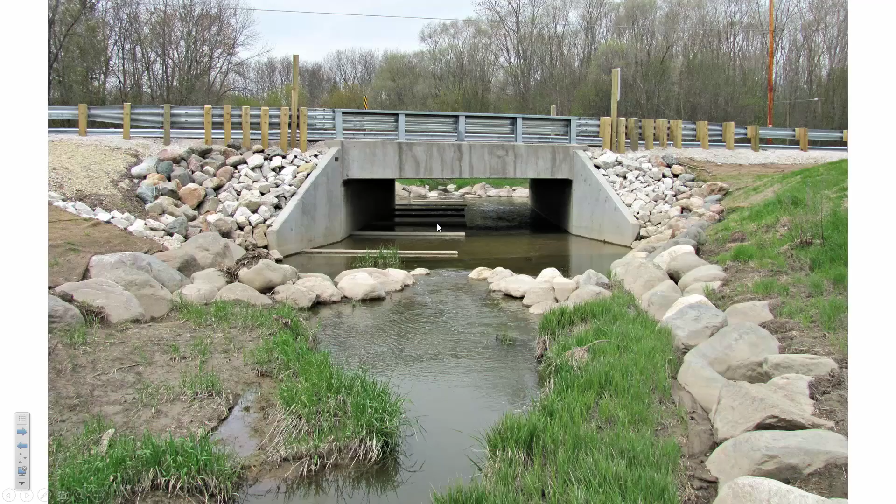My area of water resources largely considers questions like: if there's a river and a road is going over it, how big does the culvert or bridge need to be to pass a certain flow rate? Because if it's too low relative to the water line, when water levels are high, it'll flow over the bridge and cause damage and delay, and people will be stranded.

So I do some hydrological modeling to look at what happens when it rains and how quickly a flash flood will arrive in a given spot. That's actually very closely related to what our main speaker is going to be talking about today, I would imagine—his background is in hydrology and hydraulics.

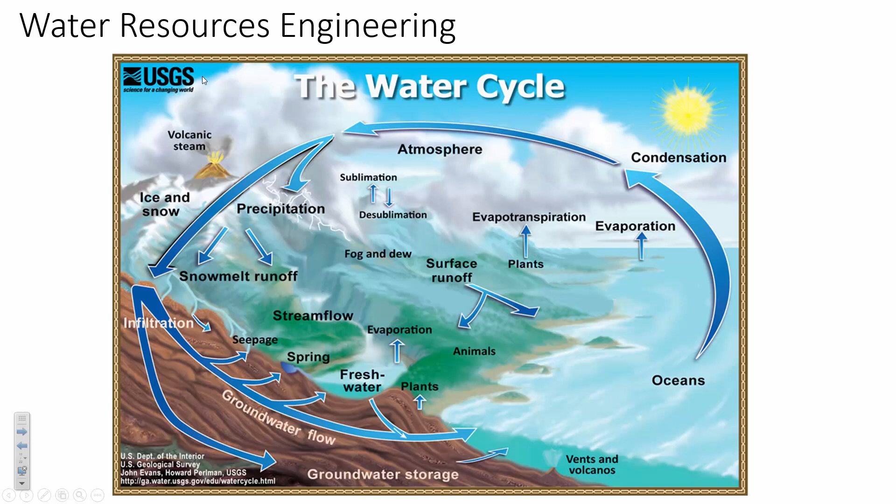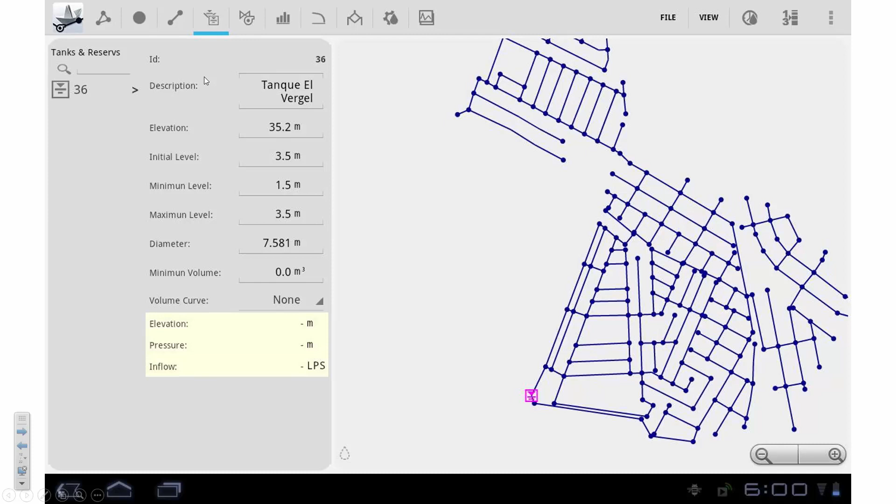In water resources engineering, we're studying applications of the water cycle. It's a bit more on the science spectrum versus applied engineering. This particular course I teach, hydrology, focuses a lot on the science of the water cycle to try to understand what phenomena actually drive the flash floods that so often cause problems here in West Virginia. We also look at water network sizing—the pipe networks that deliver potable drinking water to your home are sized by a water resources engineer with a background in hydraulics.

One of the interesting things that's come up in the last few years is you may have heard of a failure of a spillway out in California. A couple of years ago, the water level got so high at a reservoir, Oroville Dam, that the dam itself was fine, but they sent water down the emergency overflow spillway, and the water was moving so quickly, and there were some material issues with the spillway, that it actually scoured and caused a lot of damage. People were worried that potentially that scour could eat its way all the way over to the dam. So things were a little bit iffy for a while.

In all of engineering, there are consequences to our designs and to our analysis. And in civil engineering, sometimes those consequences can affect thousands and hundreds of thousands of lives.

Environmental engineering is focusing more on the quality rather than the quantity of the water and air and soil. So environmental engineers are using the toolkit that you learn as an engineer, the application of math and science to solve problems, and looking at ways that we can recycle and preserve our natural environment.

Here in West Virginia, we have some unique challenges that environmental engineers can apply their knowledge and skills on. We have a lot of mining operations that affect the state and have impacts on water quality. Environmental engineers can help to restore areas that have been damaged and design treatment so that new areas that are being developed aren't quite as badly affected as the old ones.

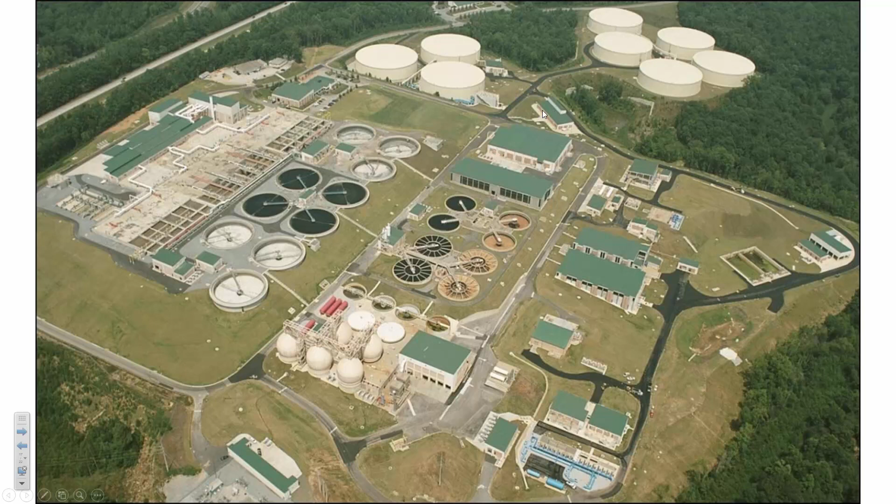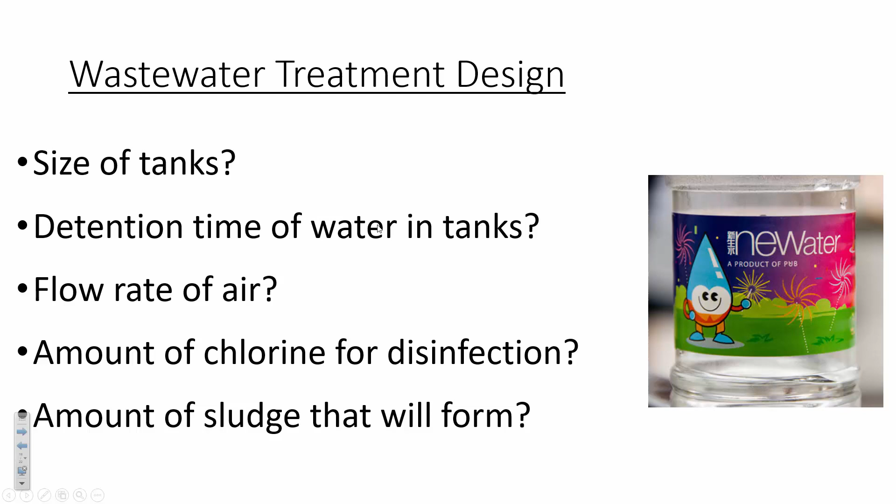We really want to have this process figured out and designed well and operating smoothly so that nobody gets sick along the way. So an environmental engineer who's designing wastewater treatment will be figuring out how big the tanks should be, how much time needs to be spent in each of the tanks for the treatment process. It's an interesting problem, and I enjoy teaching those classes when they come up.

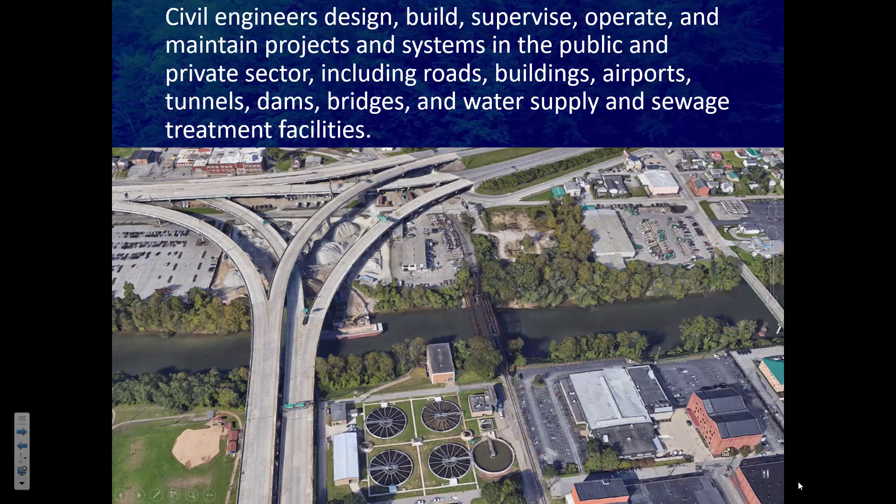And one thing that you'll see that you don't think is about engineering, but it is, the ball field. When you guys have kids, you're going to be dragged into volunteering to help with their sports. And you're going to get there and all these parents are like, how do we make the baselines right? How do we make the soccer field square? You'll know how to do that. So that's a good ancillary skill that you'll have from your training here.

But engineering, you get to have lots of fun with math. So this is somebody's homework paper, I guess. You may recognize some of those partial differential equations, but I'm not sure what to do with them. There on the right, I stole this, I have to give credit to Dr. Waite for that picture. It's from one of his fluid mechanics classes, I think.

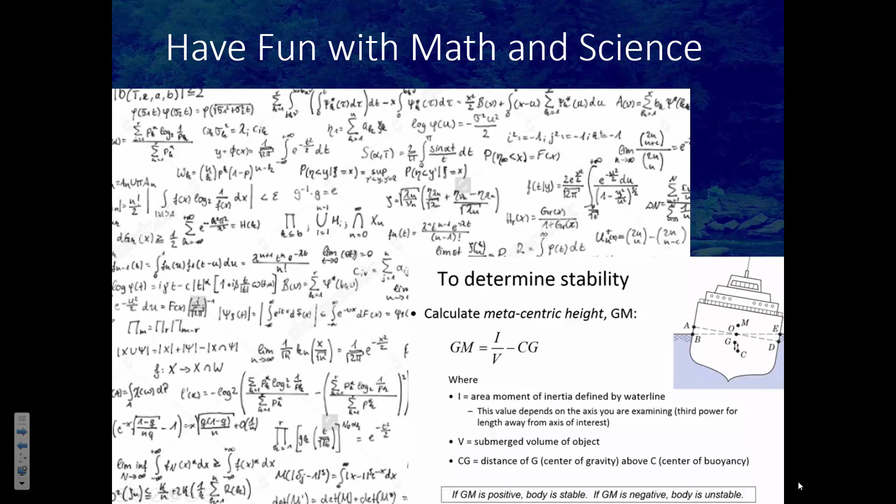But I thought it was interesting because as a kayaker, I'm all concerned about am I going to tip over, because my kayak is only about 19.5 inches wide, and I'm kind of about this tall even when I sit down. So I had to study up on how high can the seat be, how wide does it have to be, and what's the temperature of the water when I fall in. And so these are all important things that you can apply to.

So rewarding career choices, there's a lot of different things you can work on. I started my career in civil engineering doing drafting and surveying before I finished my degree. And I thought, well, that's kind of like trivial stuff. But it's very useful to be able to draw and to be able to measure stuff outside and be able to handle the outside environment. Then I did environmental engineering.

I worked on leaking underground storage tanks. I did phase 1 environmental assessments and all kinds of stuff like that. Then roadway design and structure design, geotech, and for the last 18 years I've been in hydraulics, so that's been good to focus on something fun.

But you can go anywhere in the world and work as an engineer, especially as a civil engineer, but you can also work close to home because there's going to be a lot of jobs everywhere. And I say good pay, not great pay, but it'll be good enough that you'll be able to buy plastic tubing to tap in the maple trees in your yard, so you'll be okay.

So the other division in career path is technical versus management. Most of us end up doing kind of a mixture of both. I have a small group of people that I supervise, and I also have a situation where I have to have influence over the whole state, all the 10 districts and various agencies that we deal with. So I still have to be technically savvy, so I kind of have to do both. But you can be one of the little pinheads and be off in the corner and do all this really technical, crazy stuff, or you can become the boss instead, and then you don't have to know so much, but you have to manage people.

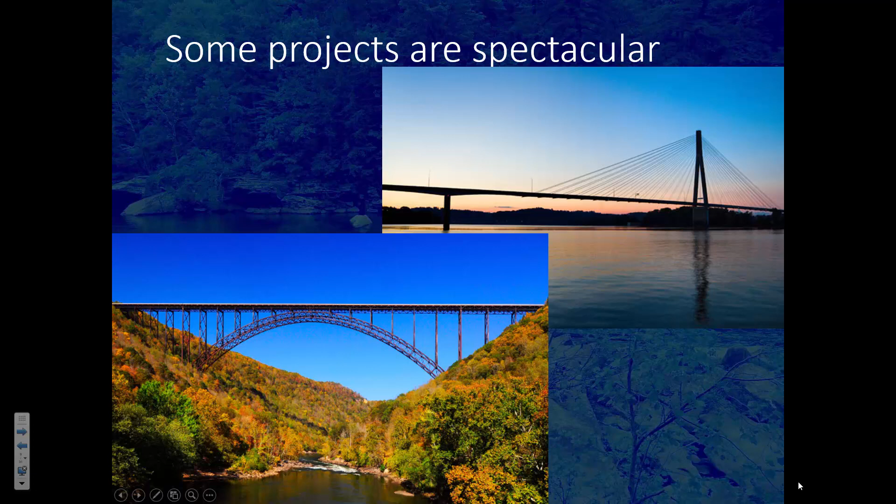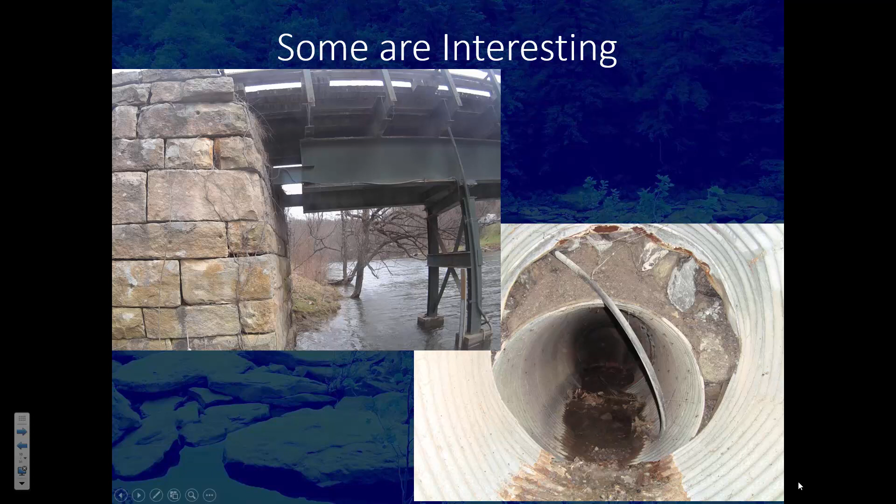So work inside or outside? How many of you guys want to work inside? Nobody. Everybody wants to work outside, right?

So this is one of the great outside places. This is up in Fayette County, I believe. Chestnut Run or something like that. This is above Prince at the New River. And so this is one of the beautiful places we get to go and see.

So the Division of Highways, where I work, there's about 38,000 miles of roads, and you can do the math and figure out how many potholes would be included in those 38,000 miles of roads. Almost 7,000 bridges. So if we replace a bridge every 100 years, how many bridges do we have to replace every year? If a bridge lasts 100 years, we got 7,000. How many do we have to replace every year?

About 69.58, right? I don't want to drive on that .58 bridge, but about 70 bridges. So that's a lot of bridges. So somebody has to design all those. Somebody has to supervise the construction of all those. So there's going to be a lot of opportunity to continue doing work.

We're organized by a central office, and I'm in the central office in one of the divisions there, and that's located in Charleston. We also have 10 districts, and there's one here in Huntington, District 2, famous or infamous depending on your perspective. District 1 is in Charleston, District 3 is up in Parkersburg. I have an office in Clarksburg, Bridgeport area.

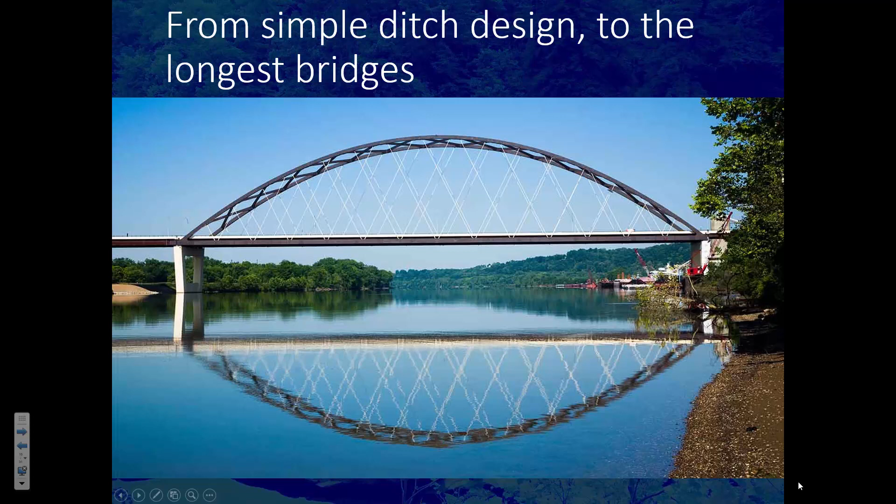Bike paths to interstate routes. We worked on the interstate here to widen it so I wouldn't have to spend an extra 20 minutes every day getting to work. Thank you very much. And then the bike path you can kind of see in the background there. I guess the animation didn't work.

You wouldn't think bike paths have anything to do with people funded by gasoline tax, but fortunately, for those of us that like to ride our bikes, we do have some involvement in bike paths, especially with Corridor H. There's more or less a bike path constructed along most of it. There's some places where they say you can just ride on the highway, and when you get over toward Burlington, that's kind of true because there's not very many cars, so you're safe on the road. But through Elkins and Parsons, there's a lot of nice trail there.

So some of us work in the office and some of us work in the field. Most of us do both. I probably get out in the field about 3-4 days a month. You can kind of have some influence on that, not completely control it. If you want to work in construction or maintenance, you'll have more time in the field.

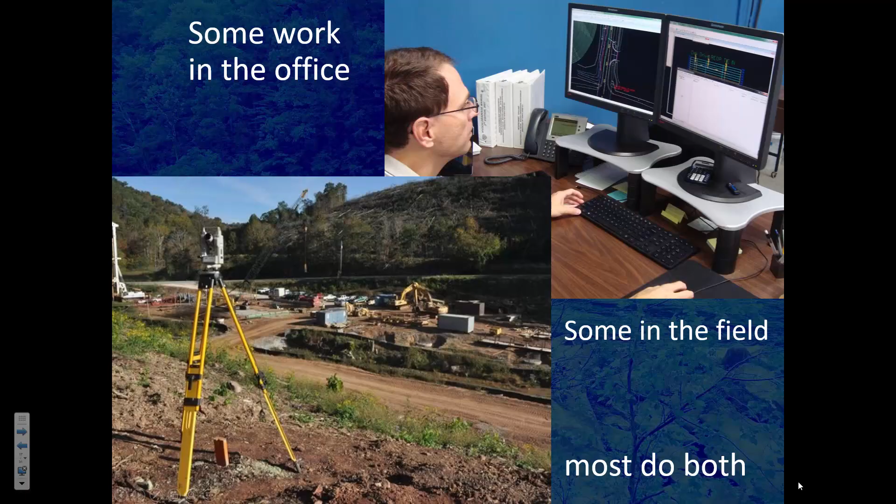So functional areas, design, the roadway, we kind of mentioned this earlier, is about the geometry. It's about the pavement, making sure you can get the cars through. Structures, of course, bridges and large culverts that they'll deal with.

Geotech, everything sits on the ground more or less. So they deal with the soil, make sure the soil doesn't slide into the river or down the hillside. Also our bridges are all founded on rock, so we rely on the geotech folks to say how deep is rock, and is this rock strong enough really to hold my bridge up, or is it some crumbly shale that's not going to last?

And the hydraulics, everything to do with water. How much does it rain, which is hydrology, and then what happens when it hits the ground and starts flowing, hydraulics.

Construction, everything's got to get built, and you'll have a class in materials at some point. You wouldn't necessarily think materials is engineering. It's more of a science thing, but you have to do some math and some testing there. So that's a place where a lot of people specialize: concrete, steel, different metals.

Maintenance, you really have to take care of stuff. And who would rather build something new, or who would rather take care of something that they already have? How about build something new?

You know, that's where the excitement is. That's where the fun is. Until you drive over a bridge that says posted for 3 tons because the section of the beam has rusted in half, or you hit 40 potholes going down your street and you say, you know what, maybe this maintenance is something we should pay attention to. I think it's an age thing. I find the older I get, the more I care about maintenance, and the less I'm beguiled by the excitement of creating new.

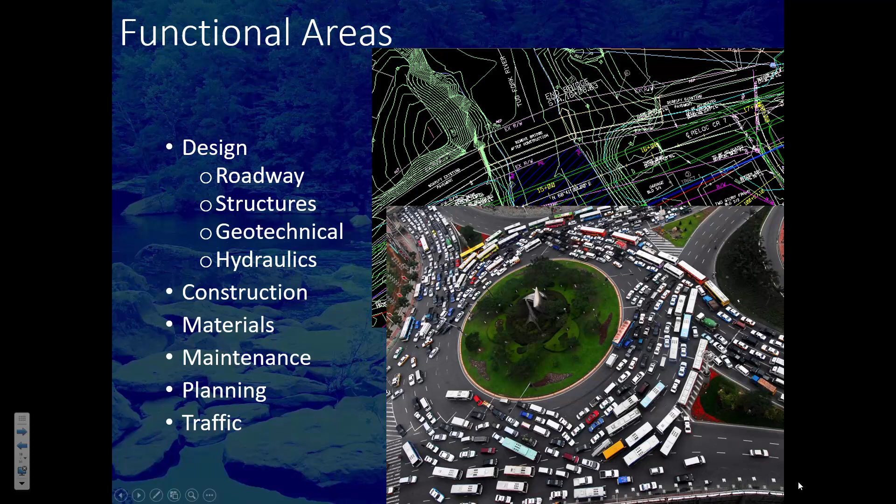So the engineering cycle. This is where our curiosity comes in and our technical skills come in. We want to figure out what are the problems, what are the constraints, what do we need to fix, and where are we limited on what we can do with this.

Brainstorming ideas, this is fun. This is my favorite part, just trying to figure out how do we do this, how do we come up with something. You're always going to come up with several ideas. Then you got to pick which one you're really going to do, and then you draw pictures and get what you need to do it and follow through.

And then you can kind of rework and go through this whole process. As engineers, you can just go round and around and around in a big circle here. It's a lot of fun, but you may not ever get anything done.

Remember this, and this is posted - my brother works at a plant somewhere and has this on his toolbox. Two of the brothers are engineers, and he's a worker. So he says, in every project there comes a time when you have to shoot the engineers and start production. So keep that in mind.

You can do fun stuff and say, well, what if we tweaked it a little bit more and did this? Eventually you got to go to work. You got to get it built.

Another organization we have within highways is planning, and they produce these nice maps for us. You notice they've changed a little bit in the last couple of years, and they also coordinate with metropolitan planning organizations. I'm sure Huntington has one here, probably includes a wide area, and so there's a lot of big picture thinking.

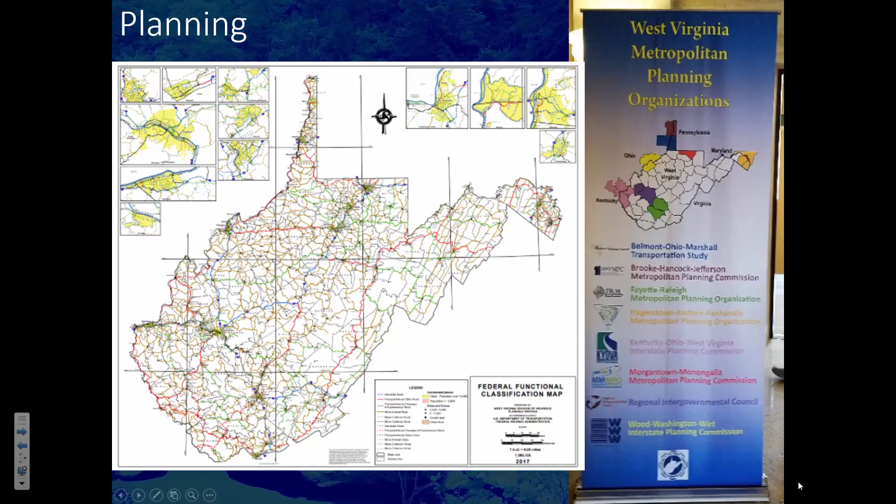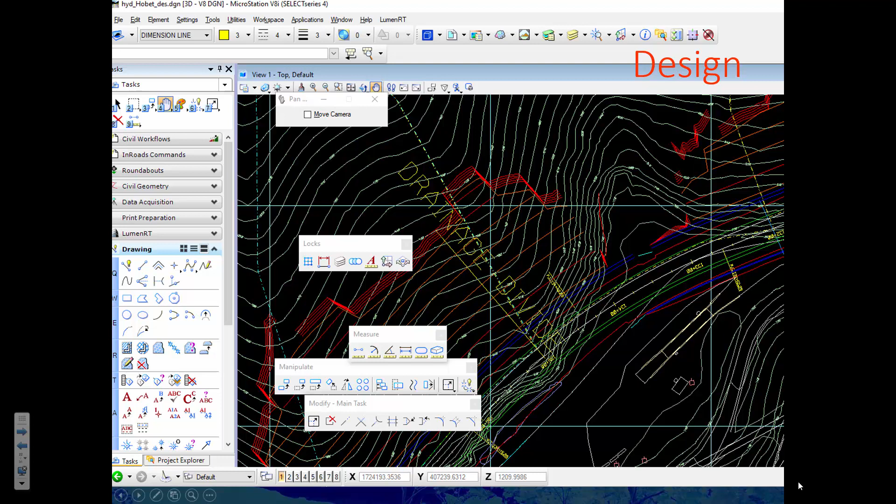You can see those contour lines are real close together, which means it's straight off. So we're trying to figure out the cut and fill. If we move out to the left, we have too much fill. If we move to the right, we have too much cut. With the computer drafting program, we can tweak that many times and try many iterations without having to redraw it all by hand. It really saves us a lot of time and gives us more time to go around that circle more times than the builders might like.

We're moving toward 2D models, two-dimensional flow models, and watershed modeling systems to figure out our hydrology in more detailed ways. One of the good things about being an engineer now is all the great things we thought we could do 20 years ago that we didn't quite have the computing power to do and didn't quite have the data available to do. The computing power is here and the data is coming.

We're getting LiDAR for the entire state, so we'll have a good detailed 3D map of the ground of everywhere in the state, which will be really nice, and that'll help us apply to these new programs that are coming online.

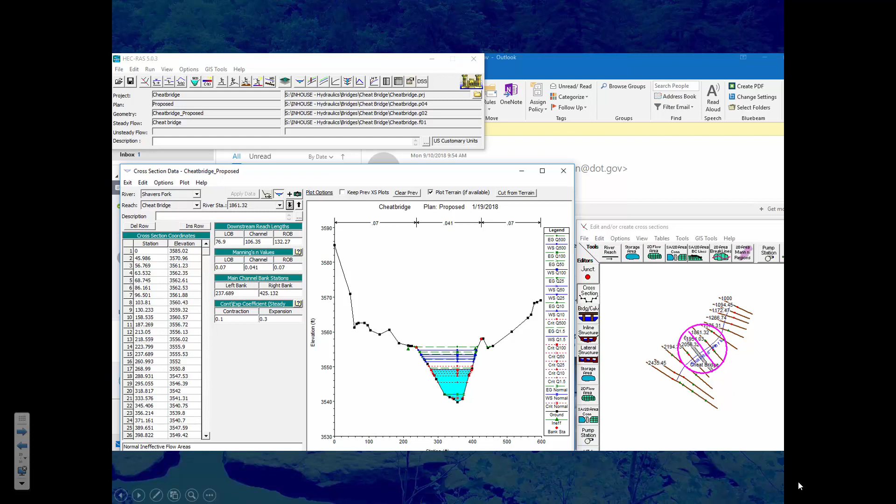So this brings me to you. You can begin your career at the Highway Department. The first thing is, after this year, you can work as a co-op, and your professors will be telling you when to apply. It's usually mid-February you've got to apply, and I know you'll be scrambling around to work on projects and get your homework done and exams and all this and that. You say, that's not till summer, I can put that off. Don't put it off, because we do have a deadline and we've got to place people. So it's a great opportunity to get a summer job.